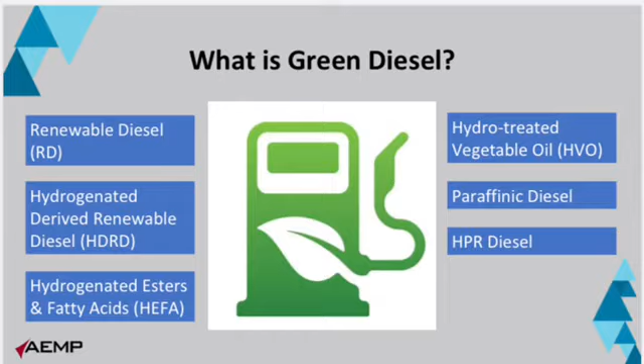Green diesel is referred to by many names, some proprietary to brands or processing. The most common is renewable diesel, or RD for short, and this is what I'm going to use in my presentation going forward. But as you can see, some of the other names used are listed on this slide. Hydrotreated vegetable oil, HVO, is very common in Europe, and paraffinic diesel is also another common name.

Okay, renewable diesel is not biodiesel. This is one of the biggest misconceptions out there today. We've all had somewhat of an experience, I believe, with biodiesel, and quite often that was a negative experience, particularly with premature failures on engines.

RD production uses similar steps to a petroleum diesel refinery, but uses the same feedstock as biodiesel. So here on the left-hand side, you can see that the same fuel source, which is what we refer to as FOG, fats, oils, greases, is utilised. With renewable diesel, the fat or oil reacts with hydrogen in a process called hydrotreatment, and with that you remove the oxygen by converting it to water, and it converts into this paraffinic fuel type. You can see the long chain there, which is very pure.

Whereas with biodiesel, you react the fat or the oil with methanol through a transesterification process, and you convert that to glycerol, yet the oxygen still remains in the molecular structure. And that's generally referred to as FAME, and not a pure structure as the renewable diesel.

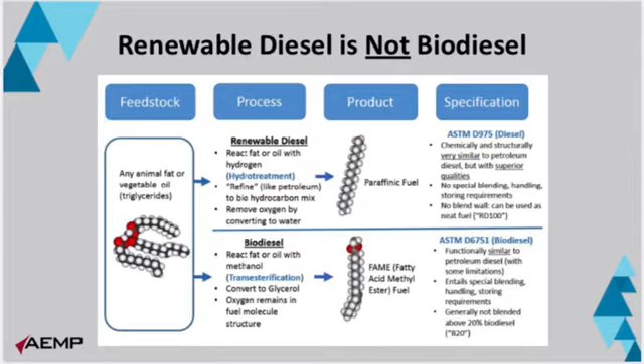Okay, typical properties of diesel. So here I'm trying to show you a snapshot of petroleum diesel, biodiesel, and renewable diesel to compare and contrast the three sources. We use petroleum diesel as the baseline. What I've marked in red and green there is to show the pros, the good elements, which on the renewable side on the far right really show a lot of benefits with cetane, sulfur, NOx emissions, cloud point, oxidation stability, cold flow properties, and lubricity, all benefits of using renewable diesel.

A typical downside with a lot of alternative fuels such as gasoline, natural gas, and propane is a reduction in energy density. This is quite common, and we have to work that into the equation. One of the biggest downsides in biodiesel, as you can see on the top line there, is a 12% reduction in energy density. So that means you need more fuel to do the same work in that engine. Whereas renewable diesel is actually on par with petroleum diesel, or potentially a 2% increase in energy density, which is a really positive thing.

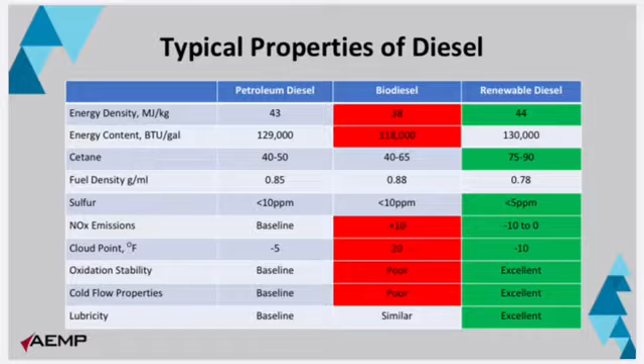Okay, feedstock. The feedstock is generally referred to as FOG, fats, oils, and greases, like we discussed before. We are currently getting all our supply of RD from a refinery in Los Angeles called Altair, and one of their biggest sources of feedstock is tallow. For those that aren't familiar, tallow is basically waste fats from other industries, and quite commonly in LA they're getting it from cows. So basically we're using remains of the fats from waste products from other industries, like the cosmetics or meat industry, and refining those scraps into renewable diesel.

Other sources include waste fish products, cooking oils, vegetable oil residuals from restaurants, tall oil pitch, crude palm oil, rapeseed oil, and waste greases.

And what I'm really kind of excited about is, looking ahead in the future, in maybe 5 or 10 years, we've got companies that have announced, like Neste, who's the biggest producer of RD in the country, that in the next 5 or 10 years they could be utilising 1 million tonnes of waste plastic around the world, and converting that into a diesel product, which is very exciting to see these other waste type products getting converted into a usable fuel.

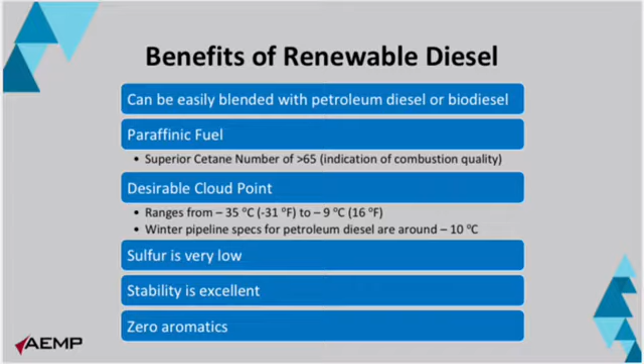Stability is excellent, so unlike biodiesel, which if you leave in storage tanks for longer periods of time, it can break down and cause issues, and you basically have to dump it. That's not a problem here, and like you said, zero aromatics or near zero, so very good there. So basically what that means is you don't really need to spend millions of dollars on infrastructure changes. It's a drop-in fuel, you put it in your tanks and you're ready to go.

This is a good example of a picture of renewable diesel versus petroleum diesel, and with the high cetane level, you can see the efficient combustion in this example here. Renewable on the left-hand side, petroleum on the right-hand side. You can see the difference in soot it emits, which is particularly evident in low temperatures and low engine loads.

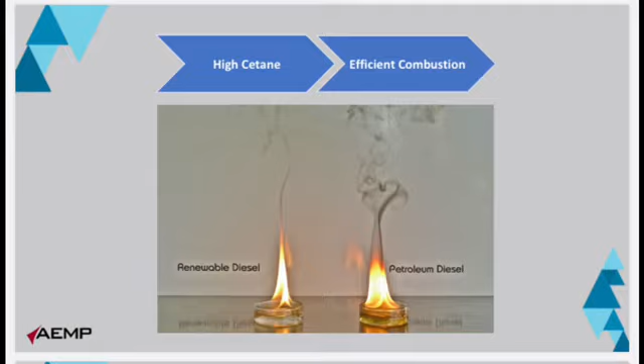Okay, increasing the life of diesel engines. We're also seeing positive results here. So this is a sample that was done on the combustion chamber of a Webasto auxiliary heater with about 21 hours of operation. On the left-hand side, you can see it with the renewable diesel test. On the right-hand side, you can see it with

ultra-low sulfur diesel. And just after 21 hours of operation, you clearly see on the right-hand side, the top of the combustion chamber clearly has a build-up of carbon in there after that short period of time. Because of the clean burning of the renewable diesel, there's basically no carbon build-up there.

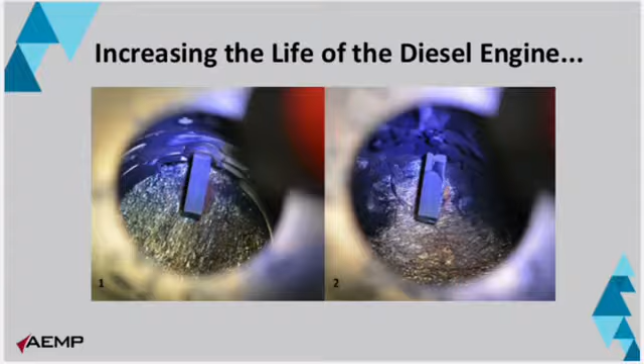Okay, reduced maintenance costs. We've done a number of tests in our fleet, and due to the good combustion and reduction in issues on the fuel systems, we're actually seeing improved maintenance costs on Tier 4 engines with DPFs. This example was taken from the Cummins website. Two examples here. On the top one, it's a Cummins engine, 15 litre. An example on ultra low sulfur diesel with a DPF.

So basically you're putting this fuel into the engine, it's coming out of the engine, going into the DPF. As it comes out of the engine with ultra low sulfur diesel, we're assuming that there's 10 mass units of PM being emitted out of that engine. You put it through the DPF. We all know that most OEM DPFs are rated at about 90% efficiency. So you're going to pull 90% of that PM out of the exhaust stream, and you're going to see one mass unit emitted out of the tailpipe. So this results in a PM reduction of 90%, which we all know today.

Below that, you can see this same example with RD and a DPF. So what we've seen typically, on the right-hand side there, you can see the emission reduction. So in particulate matter, we're about 30% reduction due to the clean combustion process and the feedstock it's made from. So when you apply that 30% reduction in PM, you start off with 7 mass units coming

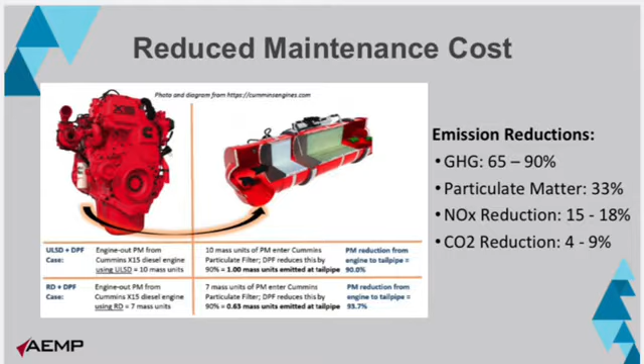So what does that mean in maintenance costs? Well, if you're getting less PM and soot build up into that DPF, it means it needs to regen less times. And if it needs to regen less times and less soot is built up into that, you can extend the maintenance intervals on your DPF. So what we're typically benchmarking on our fleet at the moment, if OEMs are saying 5,000 hour service interval on that DPF, we could potentially push that out to 6,500 hours or plus, just because of the reduced PM going into that filter. So we see that as a huge benefit going forward.

The biggest US producer is Diamond Green, who currently has 275 million gallons of production in Norco, Louisiana. They are increasing that same plant with another 400 million gallons of production within the next year or two. And they also have a new facility designed for Port Arthur, Texas, coming online, which would produce another 400 million gallons. So we're above 1,000 million gallons per year of production capacity there.

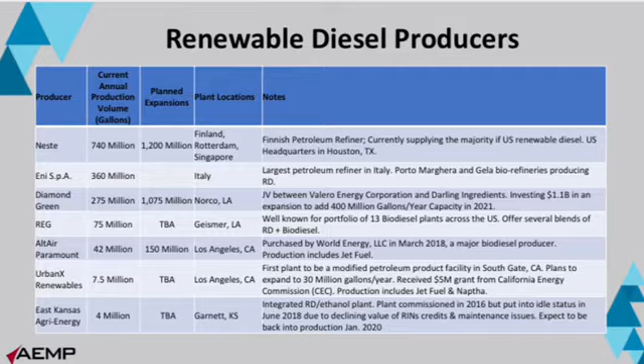There are also a number of refineries where I'm at in Los Angeles, and a few new ones coming online, particularly using waste fats and waste greases from the restaurant industry. AltAir is the major one there in South Gate, California. And also just an interesting point to note, East Kansas Agri-Energy is about an hour south of here, 60 miles south of here in Garnett, Kansas. They're a small producer. They've got an integrated ethanol and RD facility. It's currently offline due to maintenance issues, but they expect that to get up and running the first of the year. So there is someone close producing it as well.

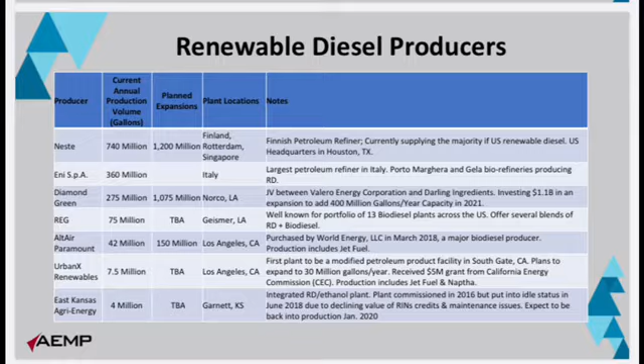Neste at the top, they're still the biggest producer, like I said before. They're producing about 60% of the world's production. A lot of that is coming into the US and California through their major facility in Singapore, and they're looking to expand that facility in Singapore. Neste is a $16 billion a year company, so they're no small entity. They've got huge pockets and are really pushing this product around the world. And also, I just wanted to note, Big Oil, Valero, and Phillips 66 are also working on joint venture projects. So the Big Oils recognize this as a source for end users like us that we want, and they're backing it with their money as well, kind of diversifying their portfolio.

Okay, what are OEMs saying? If you talk to most OEMs and dealers out there, which I did a lot when I first got into this, there's really a lack of understanding of what renewable diesel is. Their first instinct is biodiesel, so it's not really on a lot of their radars at the moment. But I did a lot of research and reached out to a lot of OEMs. This is what companies are saying.

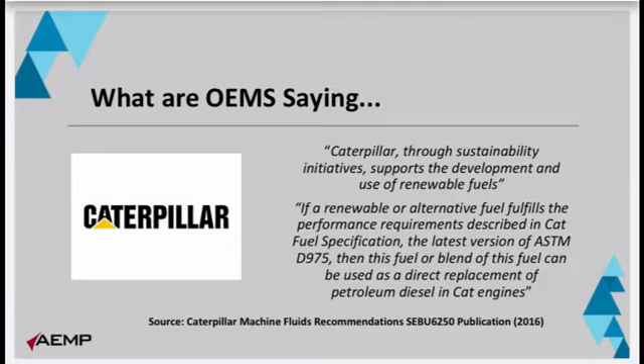Firstly, Caterpillar, through sustainability initiatives, supports the development and use of renewable fuels. If a renewable or alternative fuel fulfills the performance requirements described in CAT specification, the latest version of ASTM D975, then the fuel or blended fuel can be used as a direct replacement for petroleum fuel in CAT engines. John Deere: renewable diesel is basically identical to petroleum diesel fuel that is created by hydrotreating fats and oils. Renewable diesel that meets EN 590, which is a European standard, or ASTM D975, the US standard, is acceptable at all percentage mixture levels.

Similar from Volvo as well, the construction equipment side. Being a Swedish company, they refer to it as HVO fuels, but they say a similar thing there. We're also getting similar responses from Komatsu and most heavy-duty truck engine manufacturers like PACCAR, Cummins, Mack, and Volvo trucks.

Okay, what about engine warranties? Basically, in a nutshell, this is the situation. Most OEMs have detailed guidelines for the use of biodiesel blends, but have limited published guidelines for renewable diesel. I mean, this is basically all they have, whereas for biodiesel, generally they'll have a 2 or 3 page document documenting what you can do.

Renewable diesel meets and exceeds the petroleum fuel standard ASTM D975 for the US or European standard EN 590, which is the diesel fuel standard used by most OEMs. And because it's chemically very similar to petroleum diesel, it's my opinion that OEMs can't void warranty just because it's a different fuel source. It meets that standard which they adhere to, so it should be covered under warranty. But I definitely want to open the stage up to OEMs afterwards. If anyone has any comments, open for discussion there.

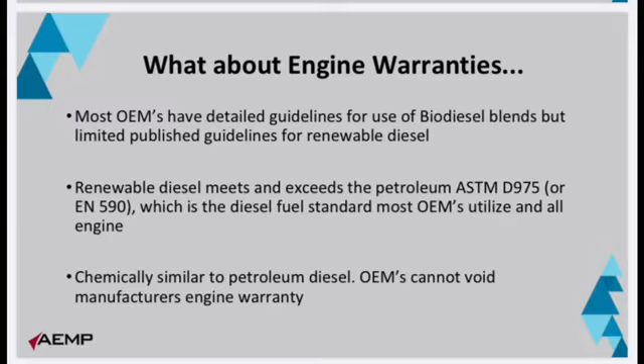I want to jump into a quick case study that we did at one of our facilities in Los Angeles. In January 2018, a little under 2 years ago, we worked with our local air quality management district, SCAQMD, to perform emission testing on heavy equipment operating on renewable diesel. This was kind of a huge leap for a local air quality management district, because for many years they did not want to acknowledge renewable diesel as an alternative fuel. They had a strong bias to promote other types of fuel like natural gas, hydrogen and electric, but they finally succumbed and agreed to this testing on one of our machines.

You can kind of see all the emission test equipment that I highlighted in red there. It's quite a large test apparatus that they mounted on the back of the machine. So this was on a Cat D9T that we run in a landfill. It had an older Tier 3 engine rated at 405 horsepower and in operation at our Scholl Canyon landfill. A third party, AAE Solutions, installed their emission testing instruments on the dozer, as you can see behind the cab, and we operated it on both ultra-low sulfur diesel and renewable diesel with the same test apparatus.

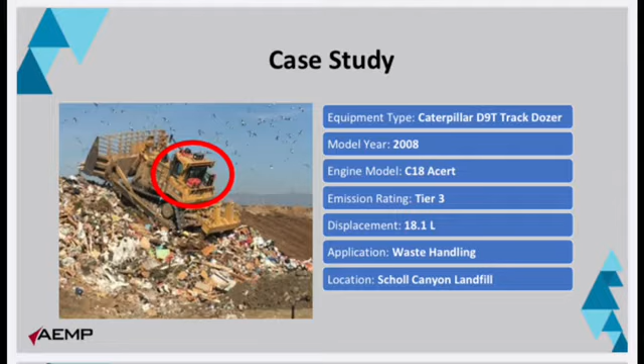Okay, here are the results. On this testing, we achieved a 15.5% reduction in NOx. There was no notable change on carbon monoxide. On carbon dioxide, there was a 9% reduction and a PM reduction of 32%. And it should be noted that our waste handling machines in that application are under high engine loads, so we push trash up slopes, leading to a fuel burn of 15 to 17 gallons an hour. So that is considered by CAT standards a heavy load situation.

Under the same test program with SCAQMD, we also ran it on a backup emergency generator, and that was on a load bank with a lot lower loads, and that actually produced PM reductions in a range of 47 to 85%, because of the lower loads on the engine. So your PM reductions are relative to the application of the equipment as well.

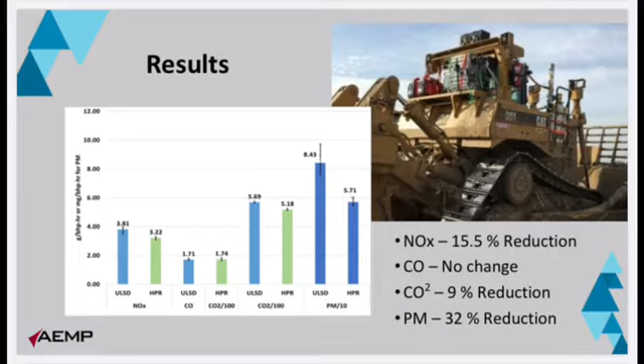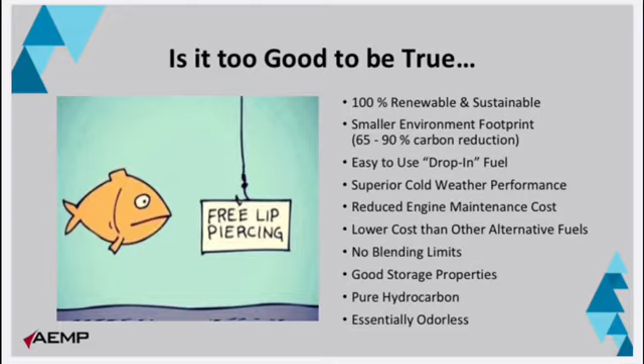So that's the end of my presentation. I tried to make it short and sweet, a quick snapshot. But I just want to open the floor now to questions, concerns, statements from OEMs, dealers, end users.

John. You posted some statistics on what the fuel was in a Tier 3 engine and your reductions. Have you looked at Tier 4 diesel, and would that set of statistics allow you to continue to run Tier 3 in California and not worry about your fleet average tier load? Yeah, it's a good question, John. For those people that didn't hear it, it was basically saying, the case study that we showed before showed the large reductions on a Tier 3 engine, and how does that relate to Tier 4 engines?